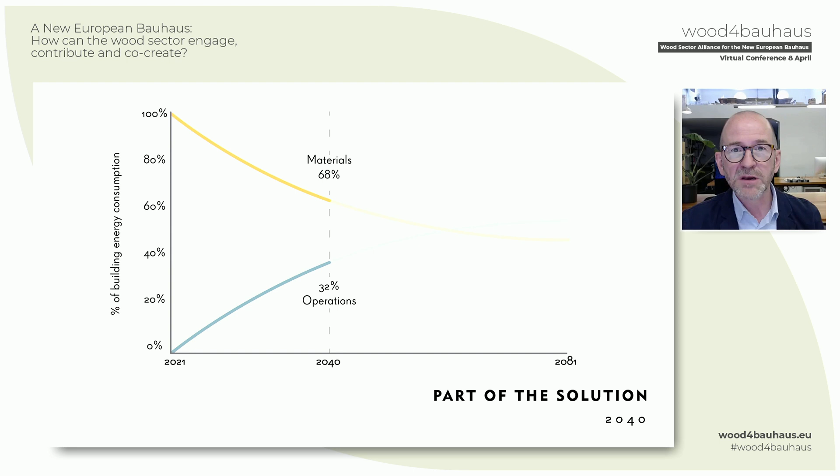That's not taking into account the massive advances happening in reducing carbon in energy production. But building materials and construction processes account for two-thirds of that carbon footprint within the next 20 years. Given the massive housing need, 300,000 new homes a year in the UK alone, this is an incredible carbon burden for our planet to bear.

So we've been looking at building in timber for some years now. In 2008, we built a 9-story timber building, probably the first one, entirely made from timber from the first floor up - timber lift shafts, timber staircases, external walls, internal walls, floor slabs, everything. And it was a joy.

We were able to build this building purely on the basis that we could demonstrate to our clients it was faster and more cost efficient to build in timber. This was not a project permitted on the basis of carbon savings. You can see this really simple process - the whole building built in 27 days by 4 people, with much less waste because of prefabrication, very quiet, fewer deliveries, and weighing less than a fifth of the equivalent concrete building.

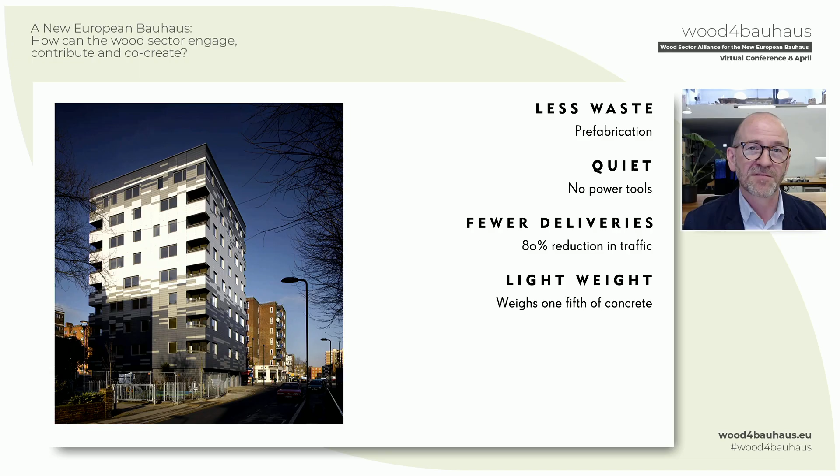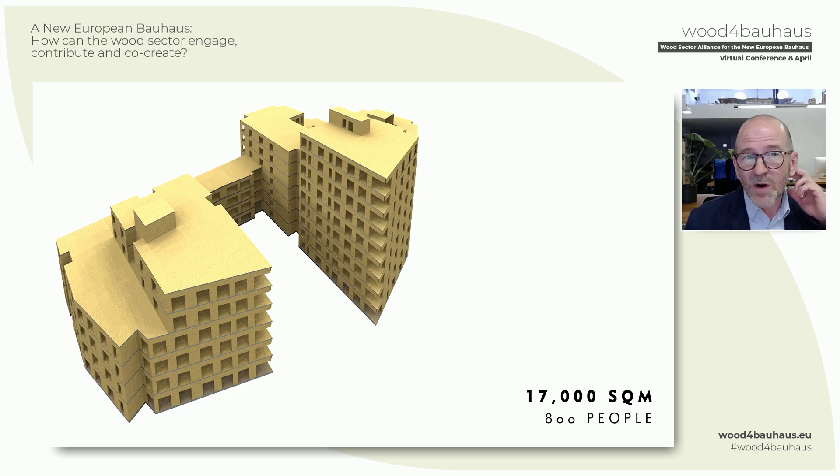We've built a lot more since then, about 25 across the UK and France. This is the biggest one, 17,000 square meters. It would have weighed 10,000 tons in concrete, weighs less than 2,000 tons in timber, and takes 17,000 square meters of space for about 800 people - which is about 2,500 trees, so just over 3 trees per person in the building. And really fast as well - you can see by the time the train's gone past, the building has finished.

One of the things we've become increasingly obsessed with as a practice is really the construction process itself and the carbon burden of that process. We know we've been building in the same way for 100 years. If you look back since 1966, a very important date in England, productivity in construction has actually gone down by nearly 20%.

Whereas in industry, manufacturing as a whole, it's gone up by 230%. We're making buildings in the same way, but slightly more slowly and slightly more expensively than we were even 50 years ago. Look at the way we made cars 100 or 150 years ago versus today - massive advances. Yet in construction, it hasn't really changed.

We've been involved with a number of different cross-laminated timber modular factories over the last 3 or 4 years, and the opportunities there are fantastic. Because each one of these big panels of cross-laminated timber goes through a cutting machine, the file that feeds that cutting machine can be completely different every time. So the timber, going through the factory process in the same way, can be cut a completely different way - opportunities for variation within that kind of modular housing are fantastic.

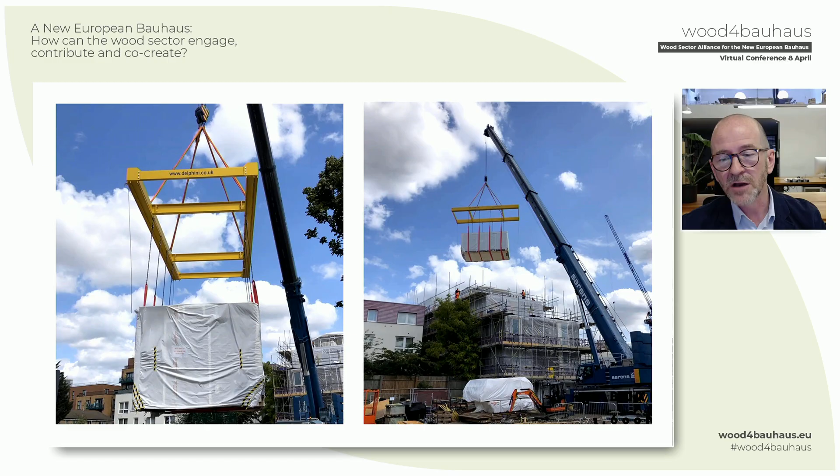So we're currently on site in East London, building 65 affordable homes for social rent in a low-cost area of East London, and that will be finished this summer.

An important part of our practice at the moment is our involvement with the Build in Wood program, a European-funded Horizon 2020 research program, working with 21 partners in 12 different countries across Europe. We are leading the first couple of stages of that.

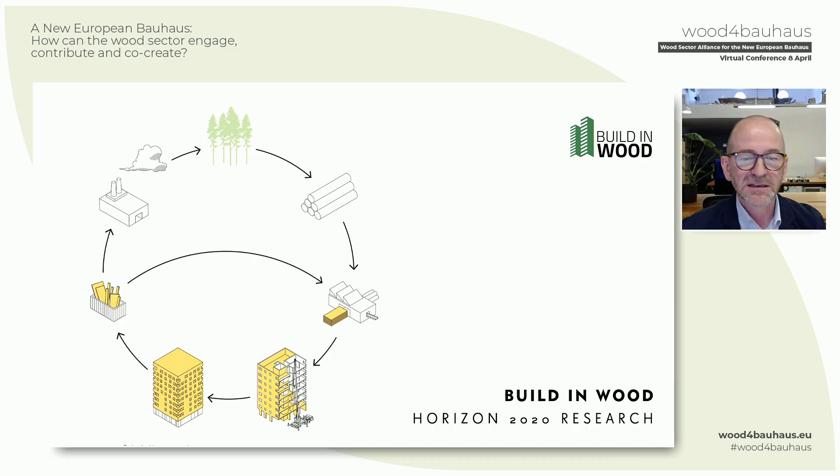That really is about understanding the circularity, the opportunity of construction in timber, and highlighting what I was discussing earlier in terms of attempting to meet our Paris targets, and who knows, for Glasgow, understanding and illustrating that we will not make those targets with business as usual, producing buildings from concrete and steel.

So this is about developing a kit of parts for building in wood, a design of buildings, of systems of construction, which is designed not only for manufacture and assembly, but for disassembly.

So taking us through the prefabrication of that building, the accuracy, the quality that's achievable through that kind of process, planning, designing for efficient transportation, speed and ease of installation, safe, clean, non-hostile working environments on construction sites. And also thinking about that disassembly, about the end of life, and how we can reintegrate that timber back into the supply chain.

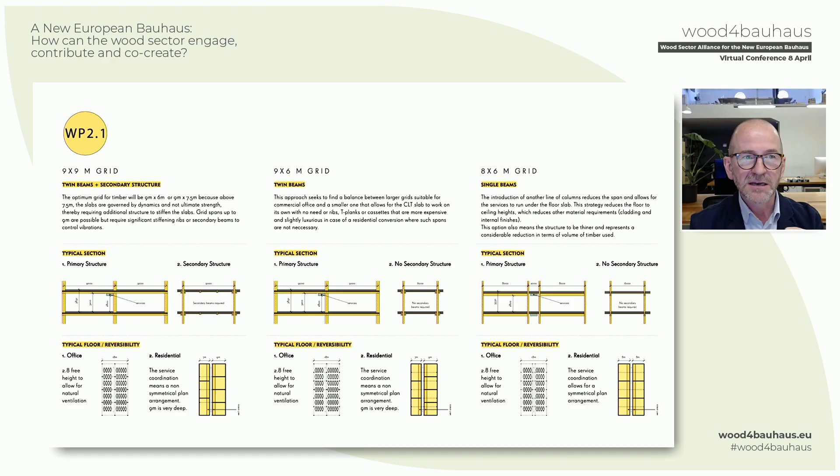And developing an understanding of adaptability as well. So thinking about how we can adapt those buildings from residential to office buildings, and from office to residential, looking at different grids, and from those grids, planning out different kinds of parametric modeling tools that we can then work through.

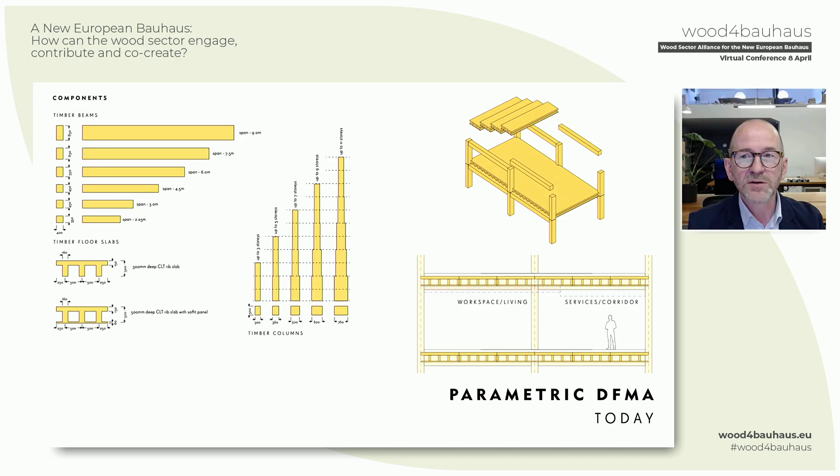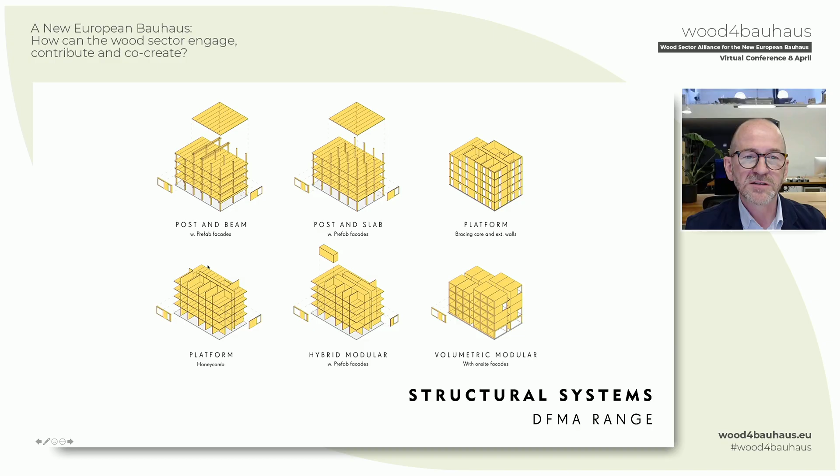In different systems of construction: post and beam, post and slab, all different kinds of natures of construction, looking for efficiencies in each one of those through design for manufacture.

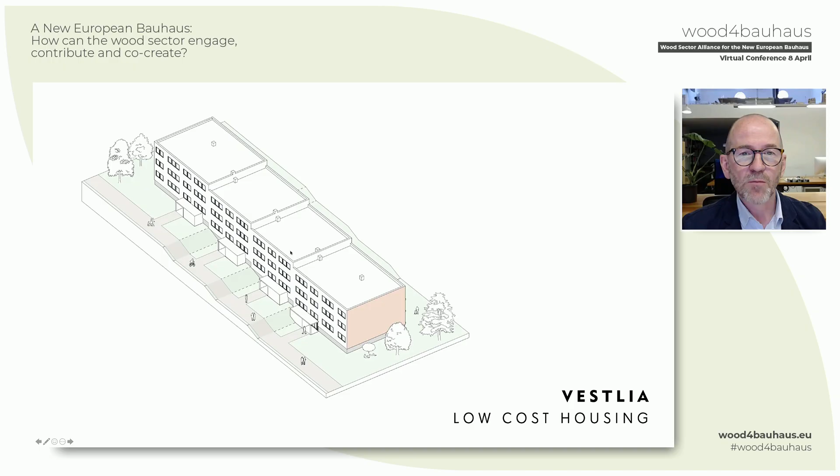What we're doing is looking for opportunities to extend that building by 2 stories, working very closely with the housing association our clients, existing occupiers, and housing need in Trondheim, and looking at how we can extend those existing buildings using the strength of the existing concrete structures in order to enlarge them.

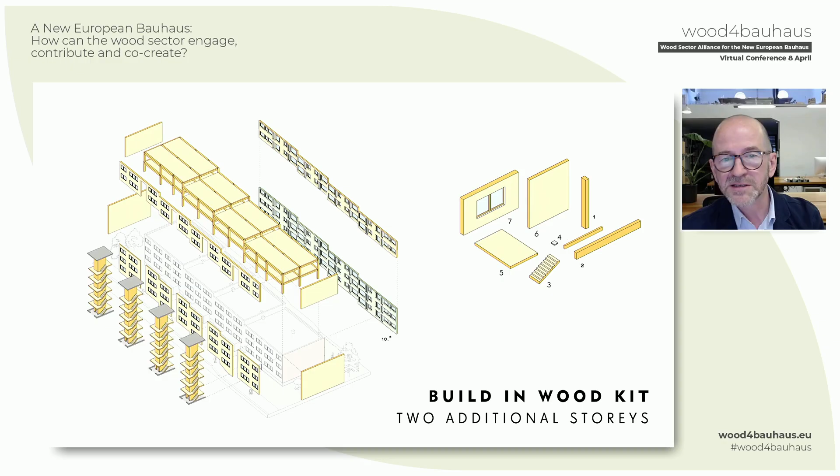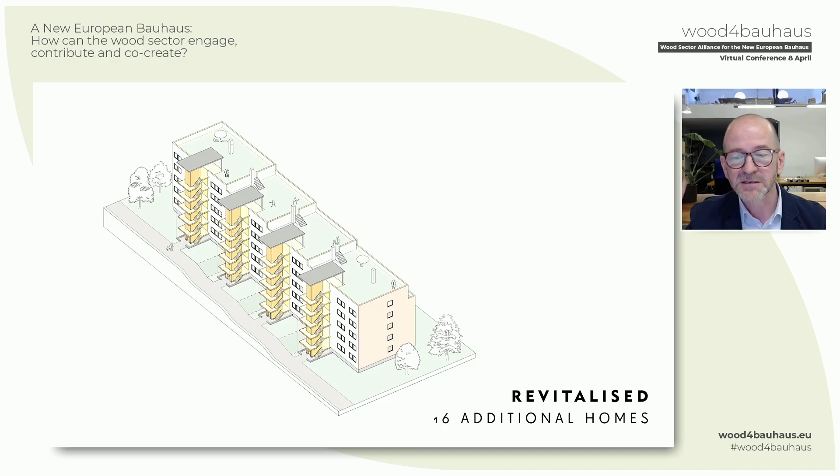We have a few of these types of projects across some of our target cities. Once completed, that will be a revitalized building, with better insulation, increased insulation around the building, new heating systems, new passive energy systems, and 16 additional homes, plus the amenity on the rooftops.

Closer to home in the UK, we are also looking at how we can work with the changing building regulations, how we can work with insurance agencies, local authorities, city boroughs, etc., to provide them with an opportunity to build zero carbon housing, or as close to it as we're ever going to get.

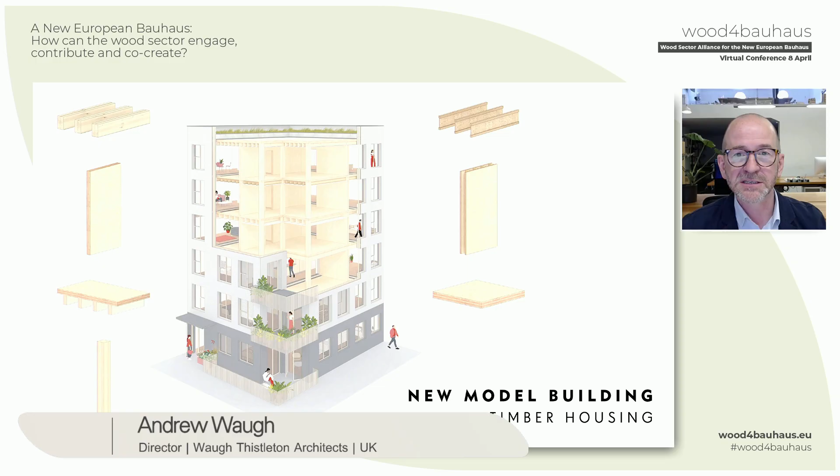So talking to them about timber systems of construction, looking at the difference, the opportunities, demonstrating to those bodies the opportunities that we can get by building in timber.

With this new model building, we know that we can take the baseline, the current benchmark for construction and operational carbon, nearly 2,500 kilos of embodied carbon there, and bring that down by building in timber, reducing the embodied carbon of our buildings by more than 2/3. Once we bring that down with the energy targets signed up to in Paris, we can really see significant reductions from current construction practice.

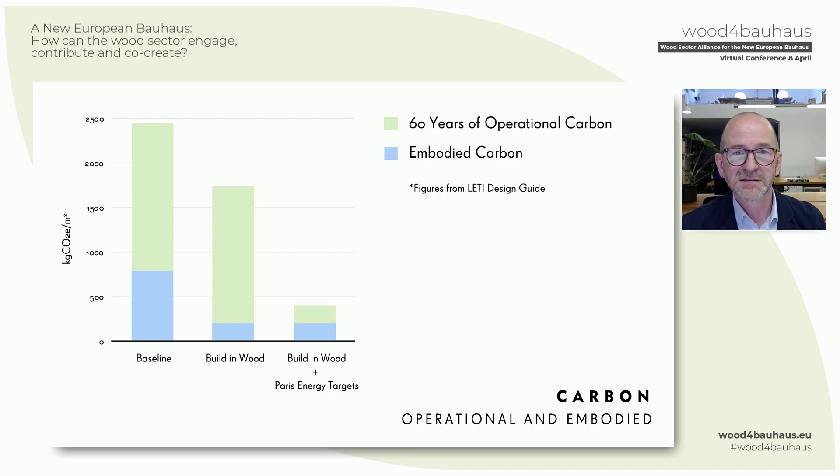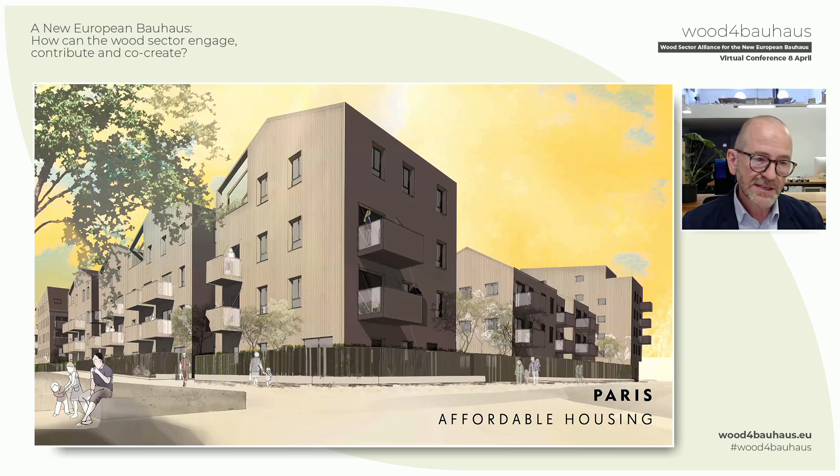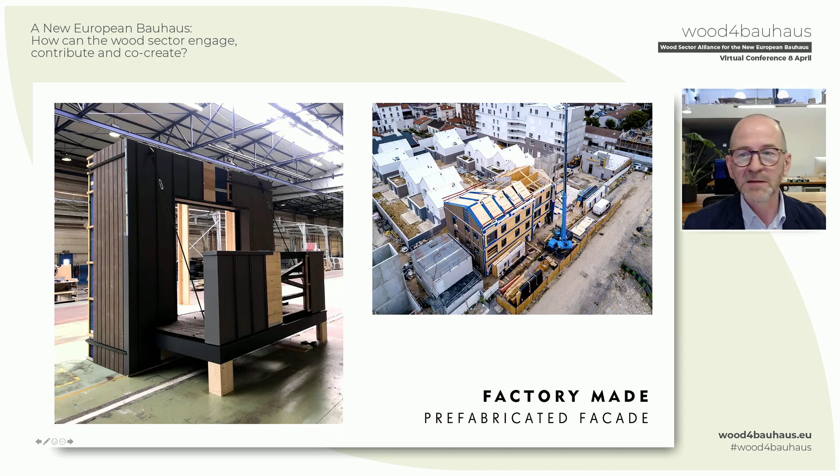That's prefabricated elements: prefabricated bathrooms, kitchen elements, and facades. You can see in the factory here on the left-hand side, the zinc facade of a prefabricated balcony and window element that is then craned into place on site. That project is now completed, with 54 low-cost housing apartments now occupied.

I'd just like to finish there with the handful of seeds. This is the number of tree seeds that grew the trees that built our first tall building, Murray Grove. Thank you very much.